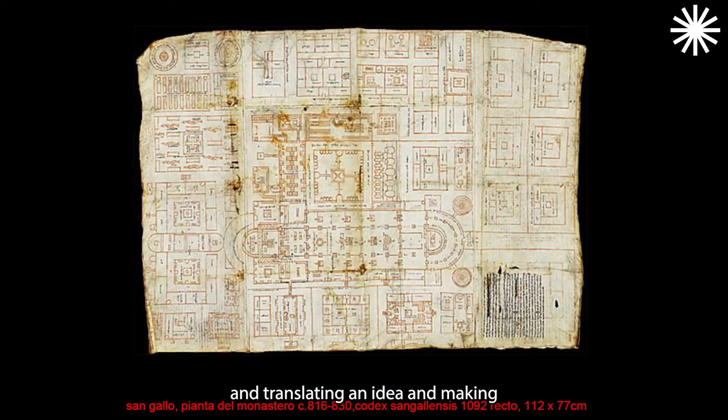That's one of the things that we talk about in our office: how do you make something that holds culture and holds time? This building is very much about holding an idea and translating an idea, making a building which reflected the dream and the vision of the university.

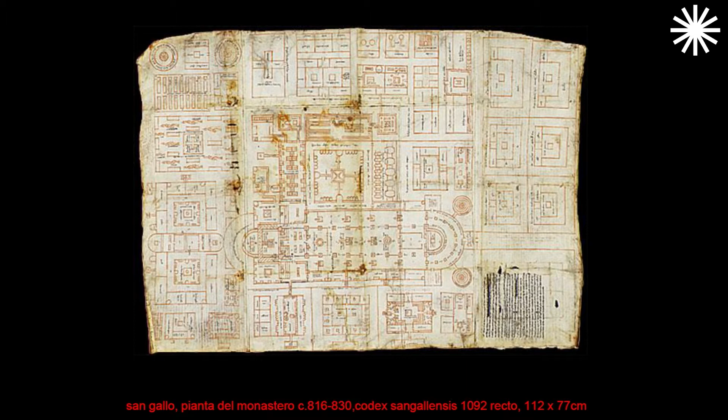We love this plan of St. Gallen because it describes a non-compartmentalized society. There's animals, there's monks, there's priests, there's farmers, and of course the monastery isn't just a custodian of religion, it's a custodian of culture and a custodian of education.

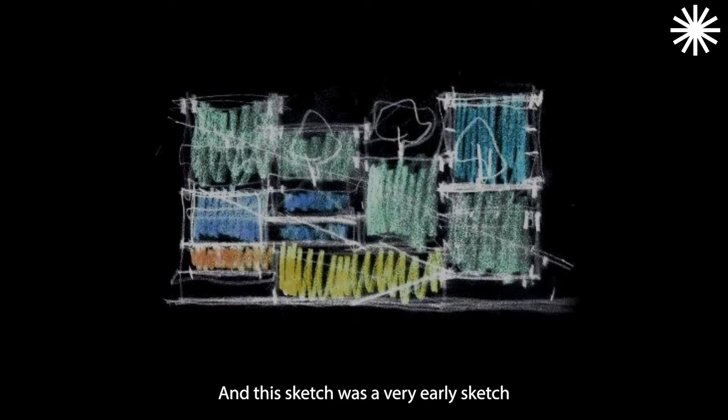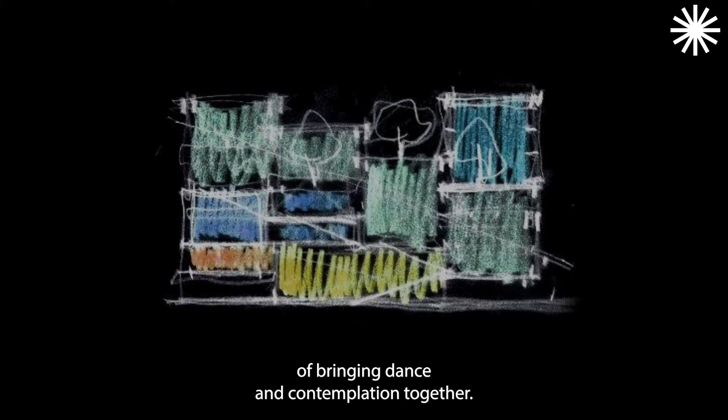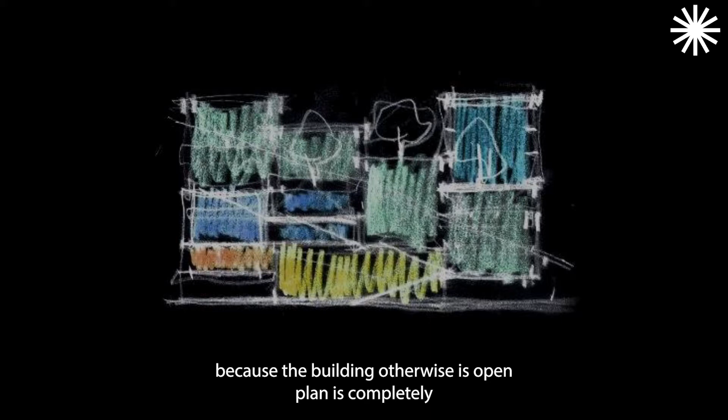This sketch was a very early sketch to do with how we could think in section about this wonderful program of bringing dance and contemplation together. So we were thinking in plan, but also thinking in section, and the fact that we might make a landscape which climbed up over the performance spaces and the rehearsal studios, which were the only rooms in the building, because the building otherwise is open plan. It's completely open to everybody.

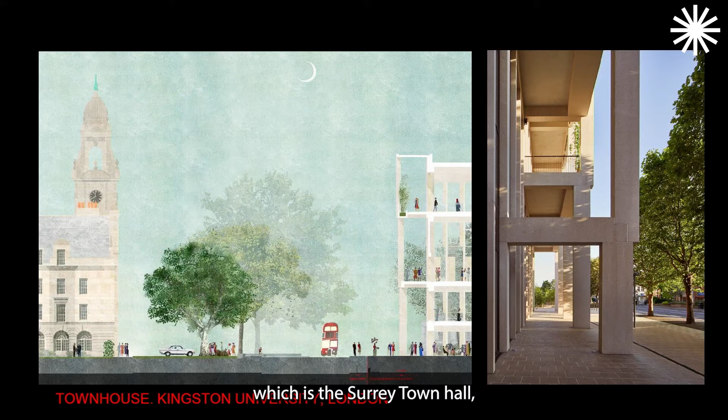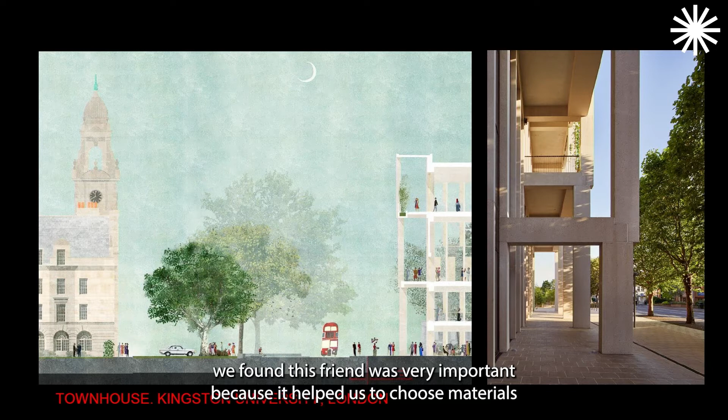And then, of course, the university has to have a civic presence. We had this friend across the road, which we call it, which is the Surrey Town Hall, a beautiful Portland stone building. In quite a hostile, not very beautiful environment, we found this friend was very important because it helped us choose materials, and it helped us choose a civic kind of scale and height, and to have a conversation with this building.

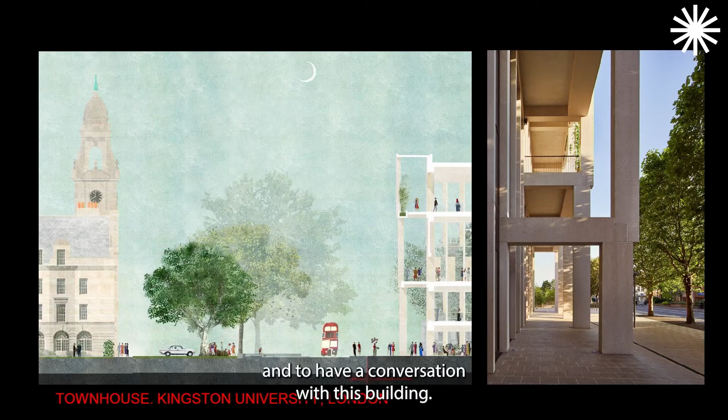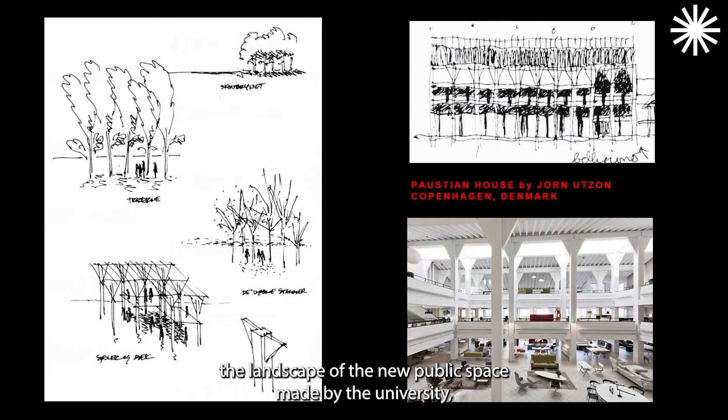We made this stepped colonnade, which brings with it the landscape of the new public space made by the university, replacing car parking. And we love this building, and we felt that somehow this resonated with the vision of our client.

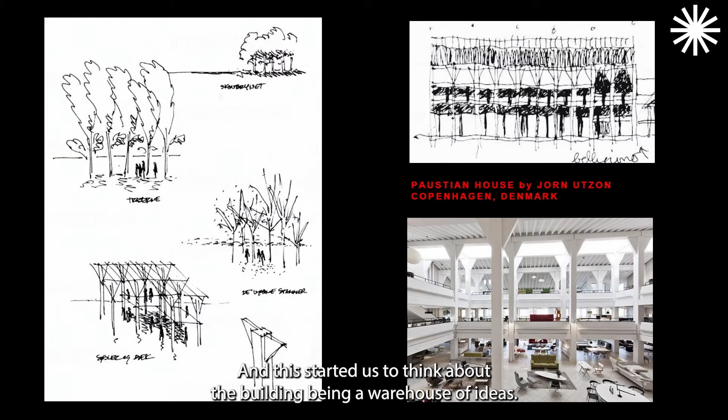It's a furniture showroom by Jorn Utzon in Copenhagen, and this started us to think about the building being a warehouse of ideas. But also we love these sketches because they bring landscape right into the body of thinking, which was also our thinking.

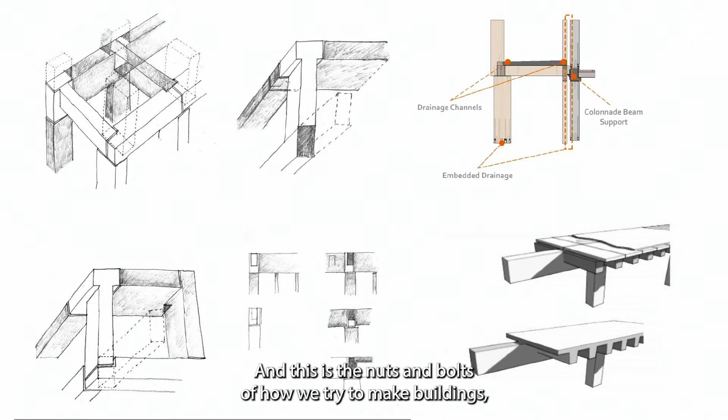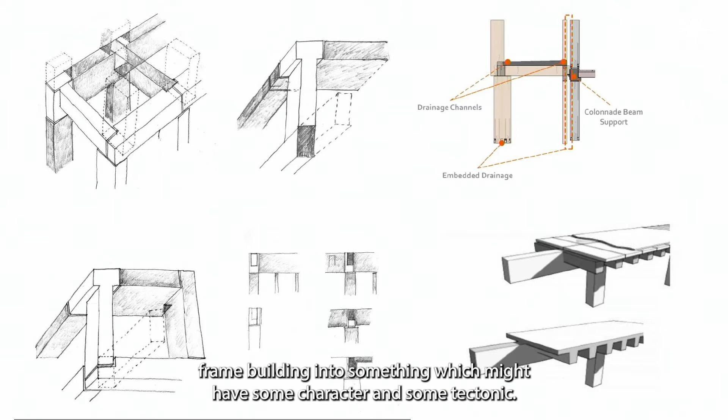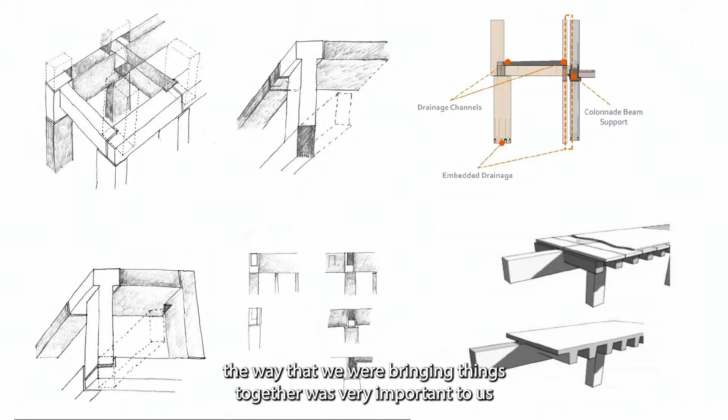This is the nuts and bolts of how we try to make buildings: to take something very rudimentary, a precast concrete frame building, and turn it into something which might have some character and some tectonic quality. So even though the means are quite standardized and prefabricated, the way that we brought things together was very important to us, to give the building a certain quality.

And everything in this building does a job. There's nothing redundant. The colonnade on the edge is the fire escape, as well as being the terrace, as well as being the civic device.

And of course, reading Auguste Perret, who did the most beautiful Salle Cortot in Paris, he speaks about the Greek bouleuterion. He speaks about it from the point of view of intimacy, but also that it's a place which gives sound its freedom. And we loved that phrase of giving sound its freedom.

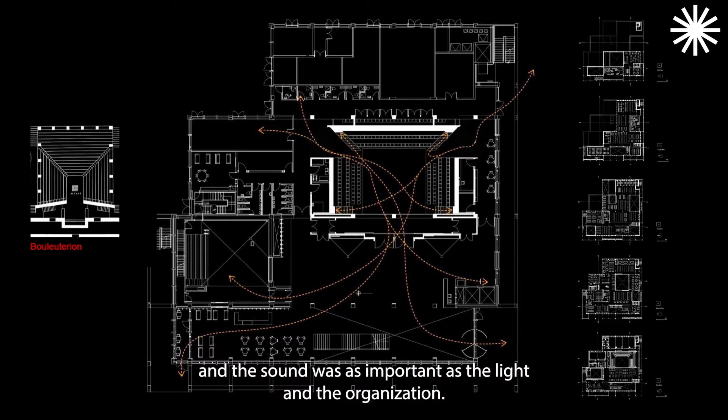And somehow the quality of the sound, Rasmussen writes about on hearing architecture. And we found making this project that the acoustics and the sound was as important as the light and the organization. And so we turned what could be a black box into a central courtyard, which is the event space. And that's the heart of the project.

And you can access this building from all sides, and you can walk from the ground to the top floor without being stopped or asked what you're doing here. And the bouleuterion is there for scale comparison on the left-hand side.

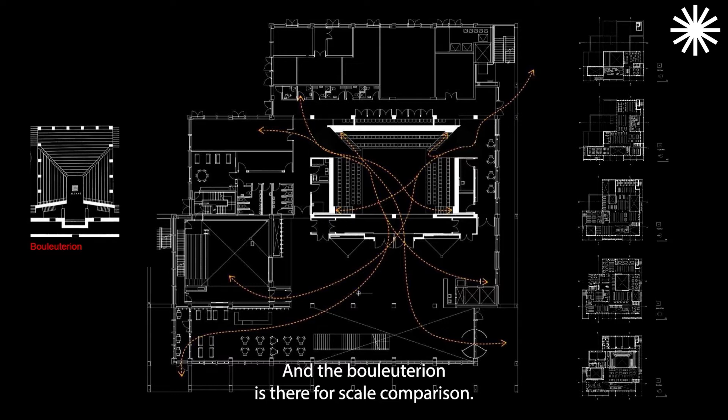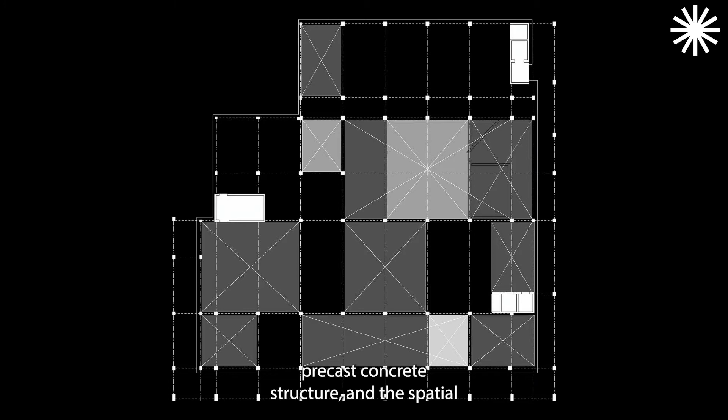And we were thinking about this three-dimensional web of space. It's 55 meters square, so it's too deep to get light from the edge. So we were manipulating the volumes. It's a precast concrete structure, and the spatial richness comes from manipulating the volumes, manipulating the light, controlling the sound, and the telescopic connection that happens through the plan.

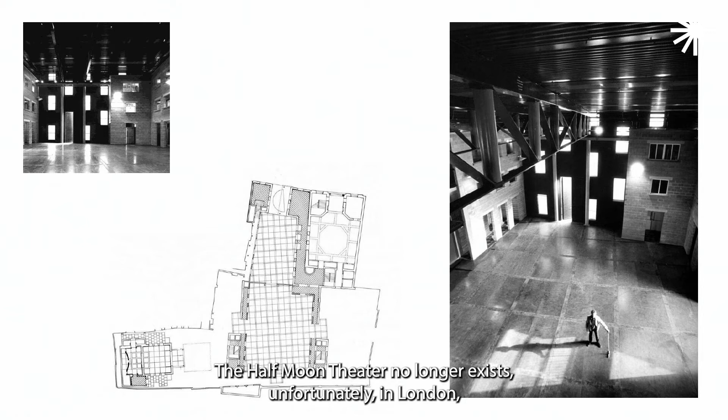We also love this project by Florian Beigel and Philip Christou. The Half Moon Theatre no longer exists, unfortunately, in London. But what we loved about this was that the theatre is thought about as a piece of city. And we wanted the central space in Kingston to feel like a piece of the street.

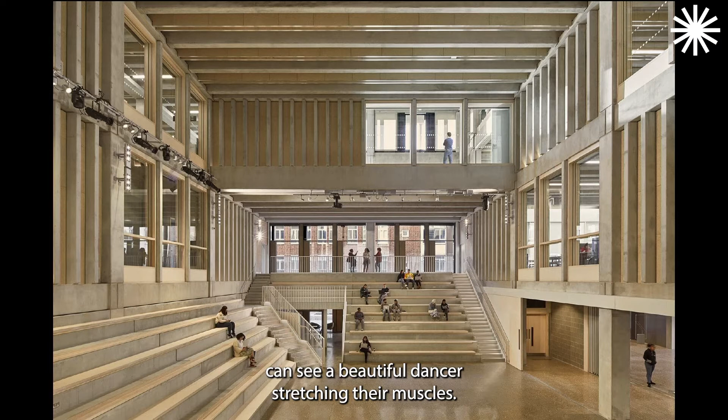And here you see the dance on the ground and first floor and the library wrapped around it. And the stretching corridor on the right-hand side is wonderful, where the intellectual in the library can see a beautiful dancer stretching their muscles. And it was wonderful today to see the dancers that you organized.

We really enjoyed that. It was so beautiful. I wish I had muscles like that, even if they're architectural muscles. To see this leg appearing above the parapet was just amazing. And this costume's so beautiful. So again, thank you to the foundation for organizing this.

But anyway, this is our central space, the heart, the folding floor, the space that connects the library and the dance. And then trying to make seating which would be comfortable but would also be robust and a place for students to sleep or to study or to be entertained.

And here they are. And what we love is that the life of the interior of the building filters to the outside, so that the exterior colonnade becomes not just a civic device, but a place of play, a kind of platform for dance and for human use.

Yvonne. Thanks, thank you. Excuse me. Thank you.

It's about active and passive. And it's about celebrating the section. So if you're moving on the stairs, you become a dancer. You are a student who is, if you like, part of the action of the university.

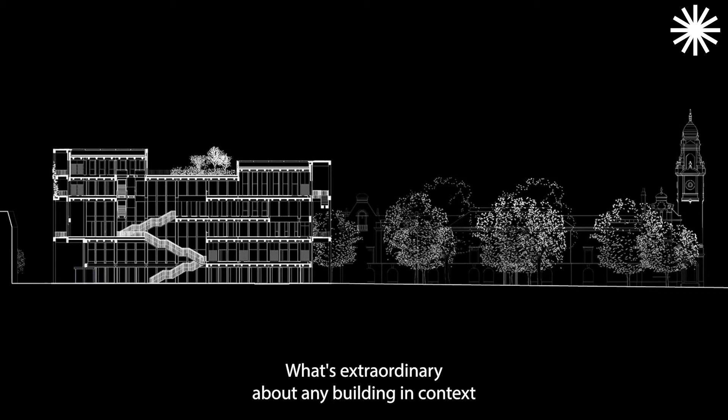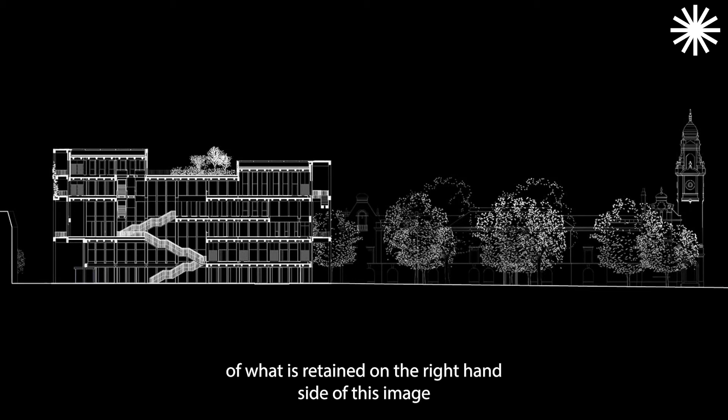On the right-hand side of this image, you have the existing trees that were surviving on the very busy road, along with the 150 car parking spaces that had been out front, which has now become a 200-meter long piece of landscape that's both a gift to the university itself and a gift to Kingston for the general public.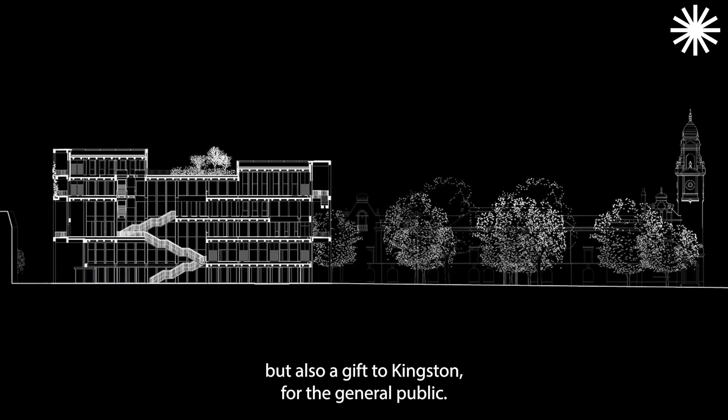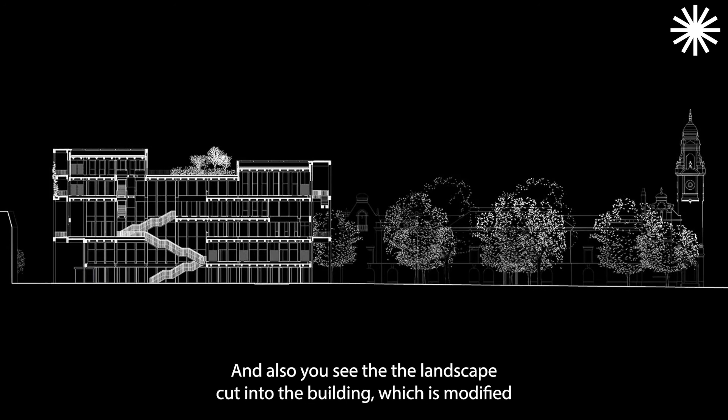So this section is describing the staircase as it winds its way up through the building, and also you see the landscape cut into the building, which is modified, though not in this section - it steps down because of its relationship to residential buildings to the east.

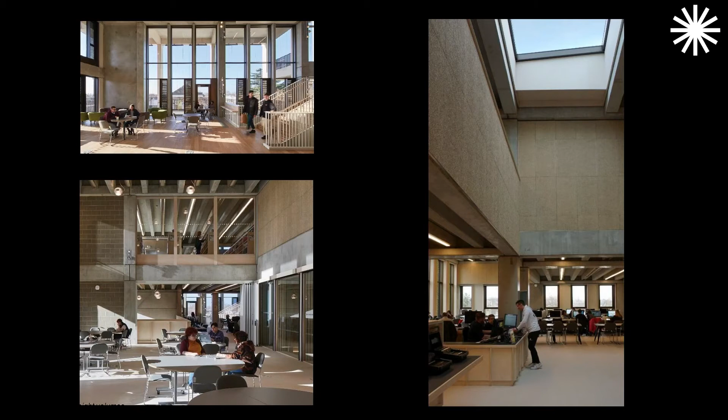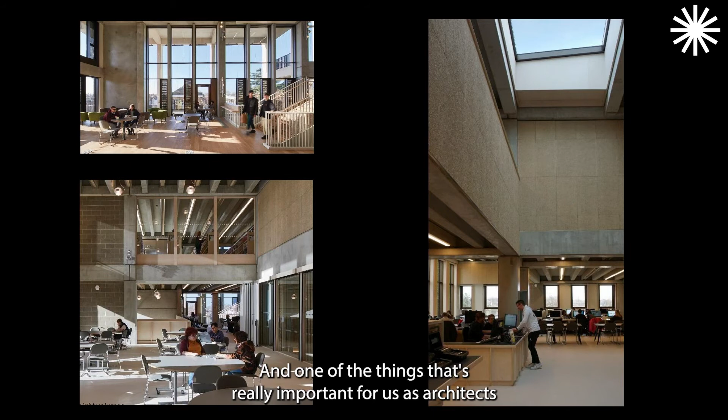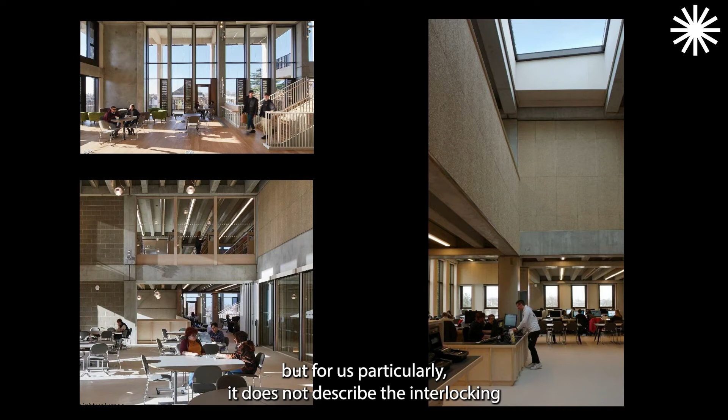Here we have some of the spaces in the building itself, in use, people sitting, studying, relating to one another. One of the things that's really important for us as architects is that the drawings themselves - the plans, the sections, the elevations - do not actually describe the feeling of any building.

For us particularly, it does not describe the interlocking volumes, the quality of light, the depth of sun penetration, the relationships that people can observe with one another. One of the amazing things about this piece of university architecture for us is the overlap of library and dance and people themselves, that people inspire each other, that this building allows people to observe and be part of their own community.

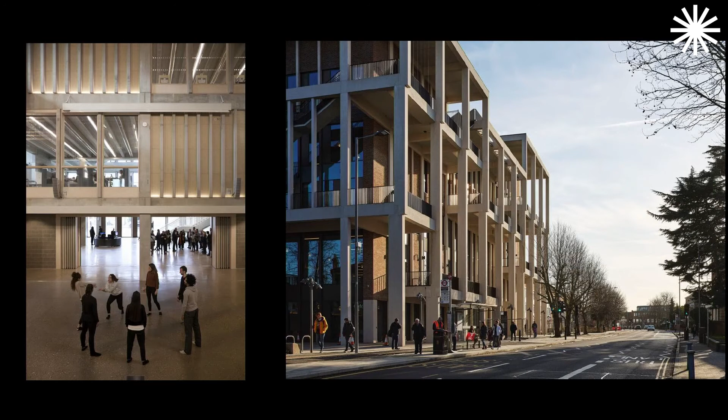Shelley described the amazing possible relationship that this building has with Kingston. Here on the right-hand side, you have the busy road - normally much more traffic than this photograph describes - but the existing trees are given a new status because they're part now of a new linear landscape.

As Shelley described, the fire escapes, the portico, is both a celebration of this as an institution. It allows the fire escapes to be civilized and become balconies. It allows this threshold between inside and outside to relate to the space of Kingston.

So if you're standing at a bus stop, you can actually enter the building, have a cup of coffee, either on the ground floor or move your way right up through the building. And that's something we'd like to reiterate again in terms of these clients, that they have said there's no control, that everyone is welcome - students, university, and the members of the public.

On the left-hand side is an image looking from the central space out through the foyer, out to the city. So your awareness of where you are in this piece of England is heightened by the building. Here you have the new relationship, the status given to the trees again - so the trees become part of this layering.

Off the picture on the right-hand side is heavy traffic. You have the trees given a new lease of life, the civilized path for the general public, and what's really an incredible act of generosity by the university - the furniture, the picnic tables that are there for both students and the general public.

This is facing due west, but it obviously then gets southern sun. And you get these dancing elements, not only the staircase inside, but the balconies themselves at various heights, giving different levels of intimacy on the facade.

I remember being in Hampton Court, and it has a maze. As we were in the middle of the maze, I said to Joe, "What time is our flight?" And we had to find our way out of the maze. So don't go into a maze if you're waiting for a Ryanair flight.

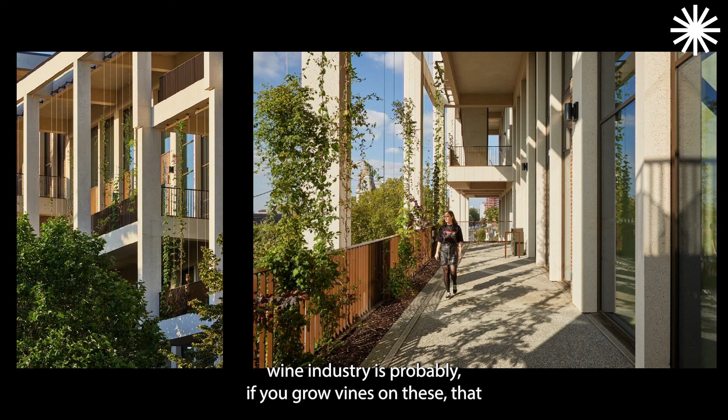Also in terms of landscape, growing on the facade is a beautiful series that over time, maybe the wine industry is probably - if you grow vines on these, maybe there's a wine from Kingston. Just at the moment with global warming, maybe there's a chance that you have your own wine. But for the moment, it's honeysuckle.

It's this layer of landscape which is ribbed up through these fine metal wires, but it means that students have this chance to be both inside and outside, and the general public can enjoy landscape integrated.

One of the most beautiful spaces, we think, in terms of the building, is high up, contained by the building, an outside space which faces south and looks over the flat countryside to the south and over the roofscapes of Kingston. It's important for students in this time, hopefully post-COVID, that they have a choice of having these kinds of seminar areas and group spaces.